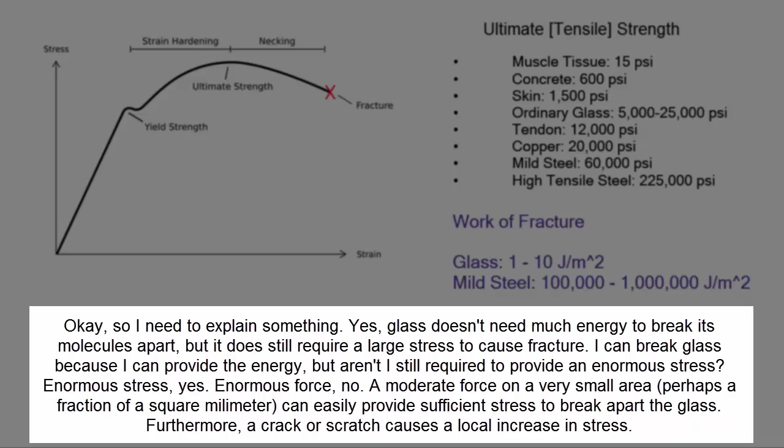Now, for a particular sample of, say, steel, the energy needed to break the sample, however many square meters it stretches in cross-section, most likely a fraction of a square meter, that energy is called the fracture energy, also known as the modulus of toughness, and it can be found by finding the area under the stress-strain graph all the way up to the fracture point.

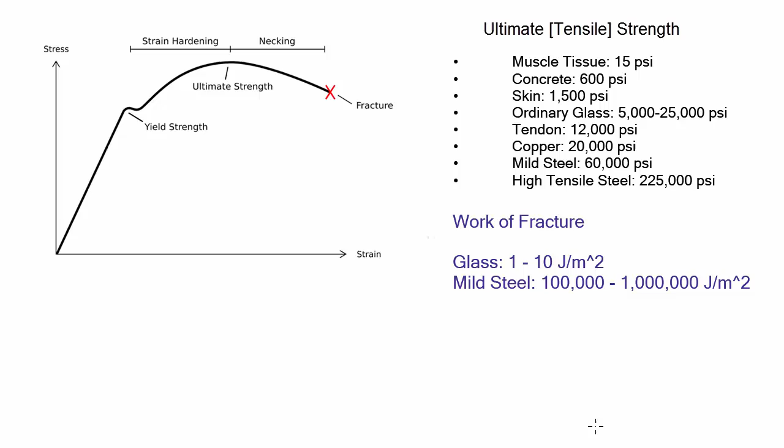So let me illustrate that on this stress-strain graph. And we'll say that this graph corresponds to steel because it does have the characteristic shape, more or less, of steel. It does not have the shape of glass, and I will draw the curve for glass later on, and we'll see it's quite different. Okay, so I filled in the area beneath the curve, and the area, whatever it is, is equal to the energy it would take to fracture the material.

You could approximate the area using geometric shapes, for example, a triangle, a rectangle, perhaps a circle. To get an exact value, you would need calculus, and you would take the integral of the function. Let me label it for you. The area in blue is the fracture energy, again also called toughness or modulus of toughness. It takes more energy to break a material that's tough.

Now, the energy that you put into the material by doing work in the physics sense on the material is stored within the material as what's called strain energy, sometimes called elastic potential energy. If you stress a material to its breaking point, the strain energy goes to breaking the molecular bonds one next to another, and the material breaks apart. That is, if you put in an amount of energy, termed strain energy, that is equal to the fracture energy, the material will fracture.

But what if you stop short of fracturing the material? What becomes of the strain energy? Well, the material will release it as the strain drops and the material relaxes. But you're probably wondering, where does it go? Well, it depends, but typically some of it goes into mechanical work, pushing on something and moving it. And the rest goes into thermal energy, and the material warms up a bit.

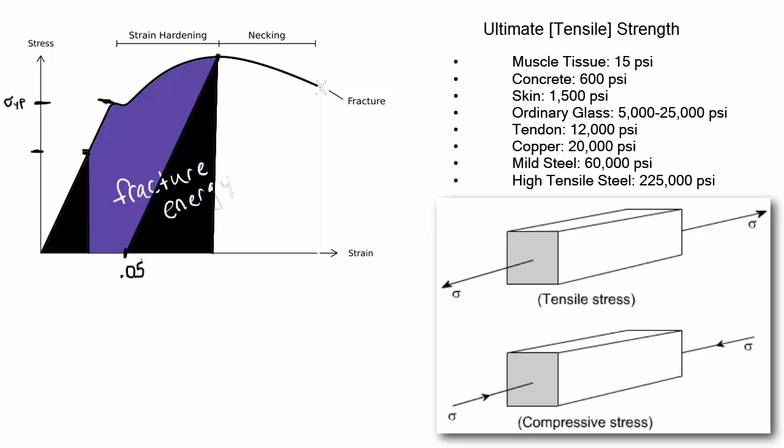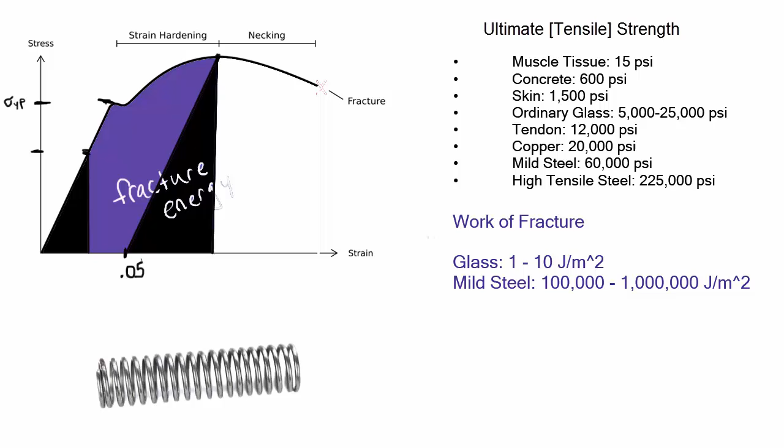If you think of a spring, a metal spring that's not tightly coiled when it's in its relaxed state, you can store strain energy in the spring either by compressing it or stretching it. In both cases, it obeys Hooke's law, and most materials are the same way. However, we're going to avoid further discussion of compression, at least for now, to simplify the discussion. But let's stick with the longbow for a bit longer.

Here's a picture of a longbow. Consider a person pulling back on the string, bending the bow. The bow starts off straight, and as a force is applied, it bends. And the bent wood is storing quite a bit of strain energy. Work is being done on the bow in the amount of force times distance. The work on the bow is equal to the force applied to the bow times the displacement of the bow.

An understanding of Hooke's law will convince you that the force varies, and in this particular case we can be specific and say increases as the bow is drawn, increasing from value 0 up to some maximum value. Thus, to obtain an accurate measure of the work done on the bow, one uses the average force.

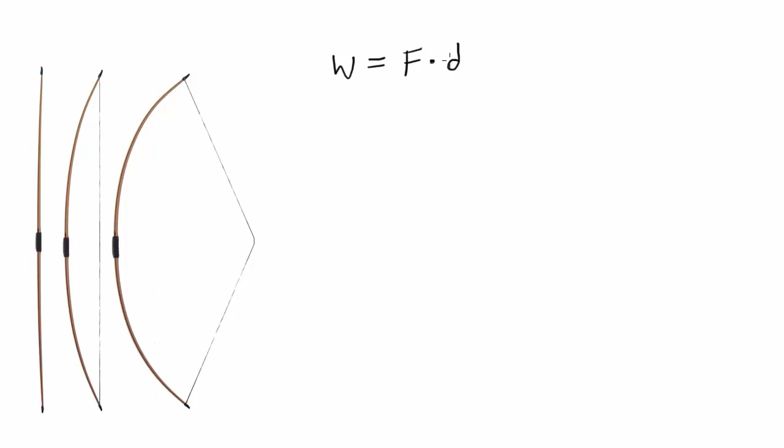As the force began at 0 and ramped up to F, the average force would be the average of those two numbers, 1/2 F. And so up here we notate that this force must be the average force, which is equal to 1/2 times the maximum force. I'm going to avoid putting the tag maximum on here, but that's how you should interpret this, times the distance or displacement.

Technically different things, but here we'll treat them as the same thing. So as I've done in a previous video, I'm going to switch over from F to P to indicate the load placed on the object, and from D to delta to indicate its extension. And I'm going to say that the work done is equal to 1/2 times the load times the extension.

Work is a measure of energy transfer. Thus we can say the strain energy given to the bow is equal to 1/2 load times extension. The strain energy per unit volume is simply this quantity divided by volume. But volume is cross-sectional area times length. And what we find here is that load over area equals stress, and extension over original length equals strain, and the work done per unit volume is equal to 1/2 times the stress times the strain.

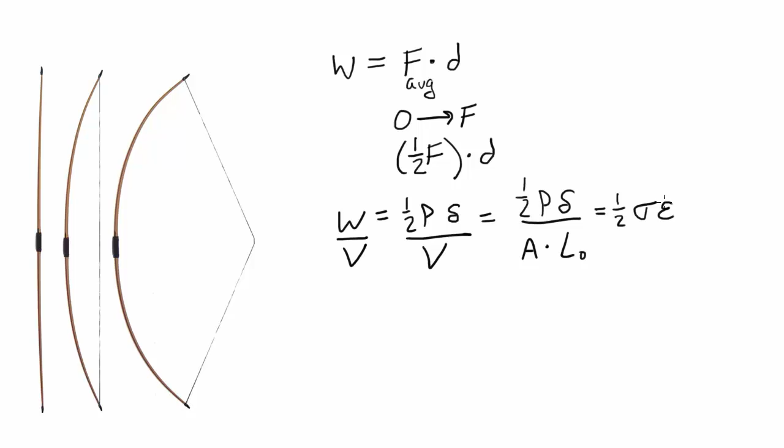If we go back to our graph, this should all make sense. What's the area of this triangle? 1/2 base times height, which is what? 1/2 strain times stress. The same thing that we just worked out while considering the work done. Furthermore, as Young's modulus, or the modulus of elasticity, is equal to stress over strain, we can modify this equation to obtain some additional information.

We say that the strain energy, at least while we are in the elastic portion of the graph, is equal to 1/2 stress times strain. And we can multiply this expression by something that is equivalent to 1, and that won't change the equality. So I'm going to multiply the numerator by another sigma, that is by stress again, and I'm going to place a sigma in the denominator as well. Okay, so I've made a change to this expression, but it's equal to the expression I had written down just a moment ago, right? Because I can just cancel out a sigma and return to my previous expression.

Now the reason why I'm doing this is to show you that this can be rewritten as 1/2 times stress squared divided by elasticity. Writing it in this fashion highlights a relationship between strain energy and stress. It says that strain energy is proportional to the square of stress and inversely proportional to Young's modulus. That is, if I double the stress on a material, the strain energy quadruples. If I triple the stress on a material, the strain energy goes up by a factor of 9. Regarding the elasticity, if we double the elasticity, or the steepness of the slope of our line, the strain energy becomes 1/2 of its previous value.

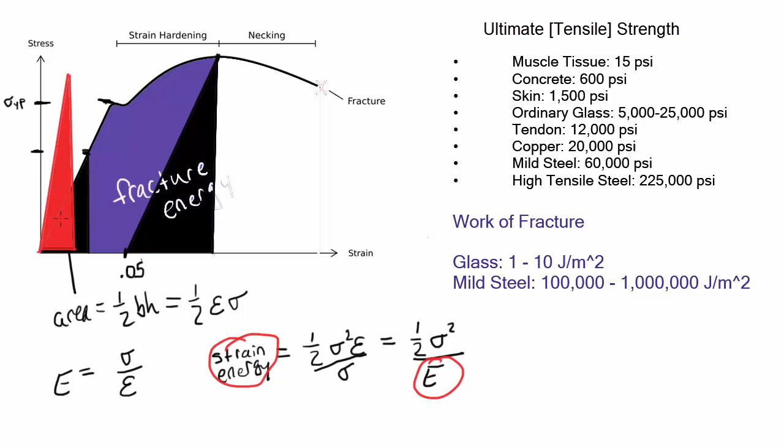Let me give you one more term before we stop. The area beneath the linear portion of a stress strain graph, whether it's for glass or steel or any other material, up to the yield point, that is, the area beneath just the elastic portion of the graph, the amount of strain energy that you can put into the material up to the point where it can no longer deform elastically, is called the modulus of resilience. So let's write that down. And as long as the material is within that portion of the graph, it is resilient. It will return to its original shape when you remove the load.

And as a reminder, the area beneath the curve all the way till the very end, the area beneath the curve up to the fracture point, which might be the same as the modulus of resilience, but typically won't be, is called the modulus of toughness, or the fracture energy.